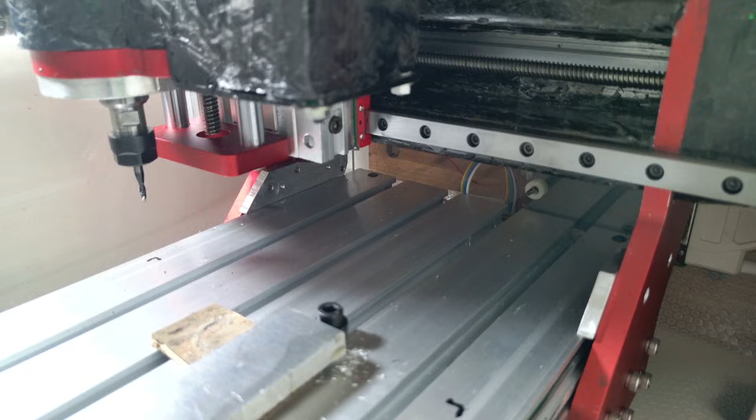Beyond Imagination CNC 1310 Overkill Edition.

Oh no, I've done it again. What a sinful man I am. I've probably made so many people sad again. What should I do? Well, freak. Long time no see. What's bothering you this time? Did you mess up again? Hey, Angel. Yeah, it's been a while. I haven't uploaded any videos to YouTube recently, but finally, I managed to finish a new one. But you know, I've been reflecting a lot.

I noticed you weren't uploading anything lately. I honestly thought you quit YouTube. I figured all your failures finally got to you, but you don't have to worry about that. Everyone enjoys watching your failures, so cheer up. And what kind of funny mistake did you make this time? What are you talking about? I would never make such mistakes.

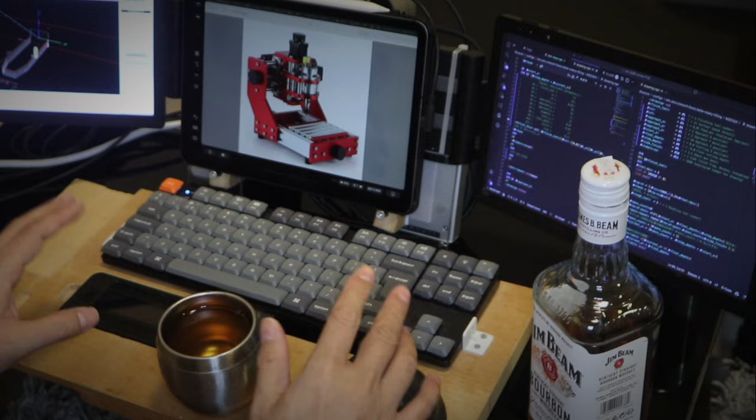The thing I'm sad about is this. I created something so outrageous, so unimaginable, that I might have made CNC modders all over the world realize they can never catch up to me anymore. And when I think about how sad that must make them, I can't help but feel guilty. Yeah, no. I'm pretty sure you don't need to worry about that. But, Angel, I wonder if you'll still be saying that after watching this video to the end.

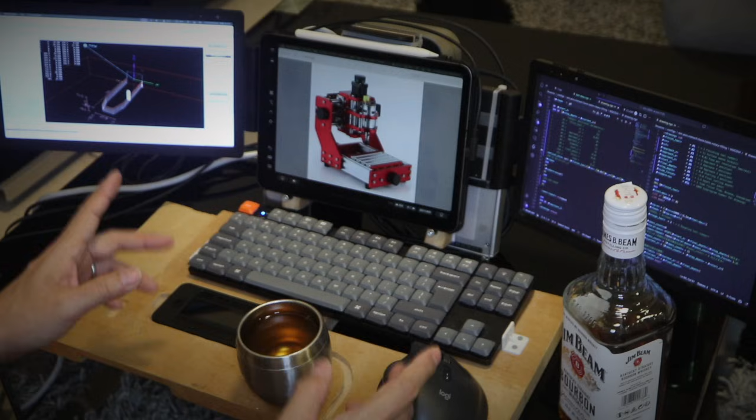This time, the modification I did was on that little red hobby router, the CNC1310. I've modded it a few times before, but this time, I went way beyond that. Actually, I think I might have gone a bit too far. I mean it. This modification is so far beyond imagination. I'm almost scared of myself. Oh, stop mumbling and just explain already. Well, I guess I have no choice. Since Angel insisted on seeing my brilliantly modified masterpiece, I'll grant your wish. What?

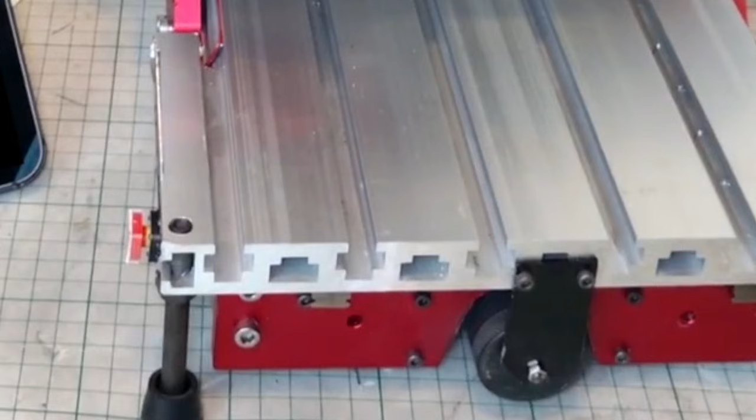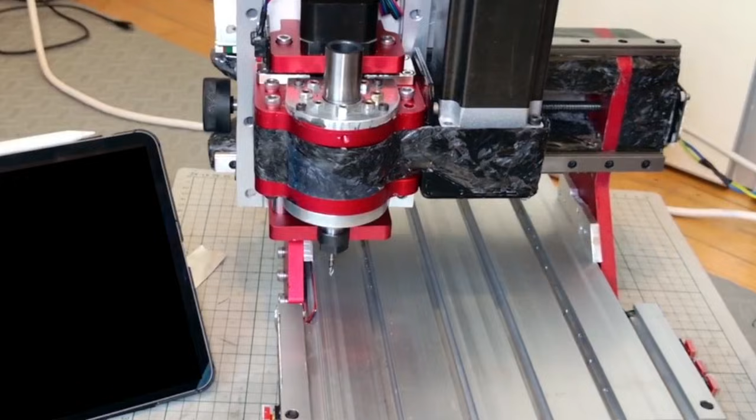Hey, the music's a bit loud, isn't it? Think about the neighbors. The production's a bit overkill. Sorry. I got a bit carried away as it's been a while since my last video.

Here it is, the machine I modified. Pretty different from the original, isn't it? Yeah, the original was small and kind of cute, but this one has some serious weight to it, especially the table and the motor. Those are absurdly huge. That's a pretty large table, isn't it? It's actually one of the key points of this entire modification. And I installed the biggest motor I could reasonably fit, so it can cut steel with plenty of headroom.

You were cutting steel in your last mod too, but I wouldn't say you had much margin for that. And the noise was awful. I kept thinking you needed some kind of noise reduction setup. I'm an angel. You know, I'm sensitive. Don't worry. I'm always grateful to all the beautiful angels, other than you, who blessed me with talent. So, to make sure the real angels out there would like this machine, I made it quiet.

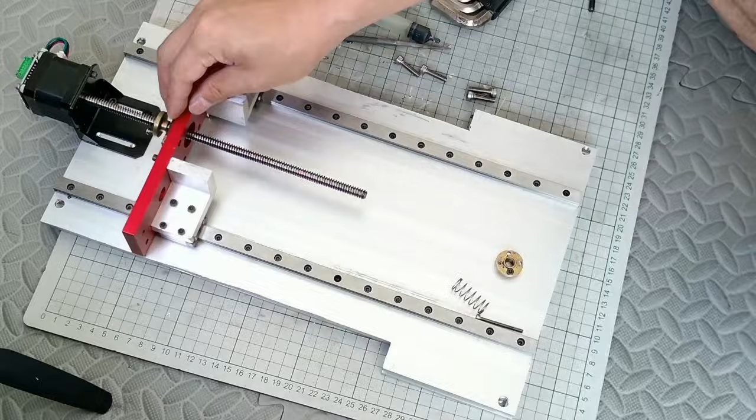Noise happens when a machine lacks rigidity and starts vibrating. So this time, the X and Y axes were upgraded from linear shafts to linear guides. The column's cross rail was rebuilt with epoxy granite for higher stiffness, and even the spindle, I made it myself to ensure the rigidity I needed.

The spindle has a cover on it, so I can't see the inside. What's going on in there? Well, inside here, I can't just show it for free. There might be some cutting-edge technology assembled in a clean room. You never know. Wow. I've heard industrial spindles are built in clean rooms because even tiny dust particles can affect performance. Is your spindle made that way too? Well, I don't exactly have an industrial clean room, so I just wiped my hands really well before assembling it. So basically, you just put it together in true DIY style. Let's not get stuck on the little details.

Let's move on. One of the biggest upgrades this time was the CNC control system. Originally, this machine ran on GRBL, which is a very simple CNC controller. But now, I've upgraded it to LinuxCNC, the most powerful free CNC control software available. Since I'm already building a 5-axis CNC machine, and I previously built a CNC lathe, I could reuse a lot of the same units, which made the setup surprisingly easy. LinuxCNC really is the best choice.

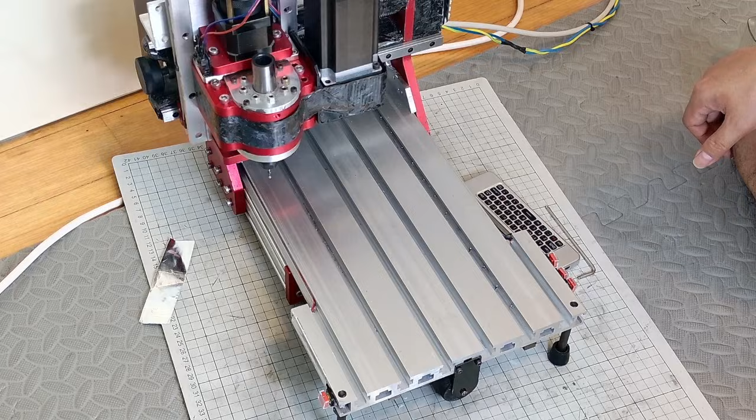The original machine didn't have any home switches, so of course I added them. Alright, let's try homing it. It looks like the table is just stretching out endlessly. What's happening? This machine uses the table as the base design. The original frame actually moves underneath the table. Because of that, the Y-axis travel increased quite a bit.

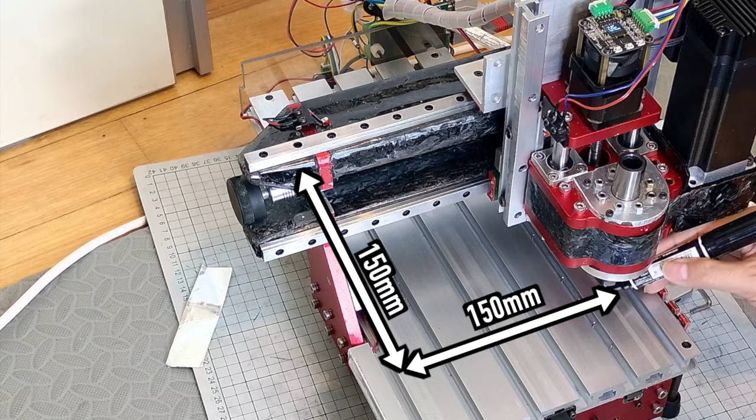But still, isn't the table way too big? You didn't have to make it that huge, did you? The table is 400 millimeters long and 200 millimeters wide. The travel is about 150 by 150 millimeters. So yeah, compared to the travel, the table looks oversized, but having extra table area outside the travel is a huge advantage for clamping workpieces.

And thanks to this design, the lead screw is completely hidden under the table, so it doesn't get buried in chips anymore. In the original machine, the lead screw was totally exposed. It was a disaster. I see. Yeah, that really was terrible.

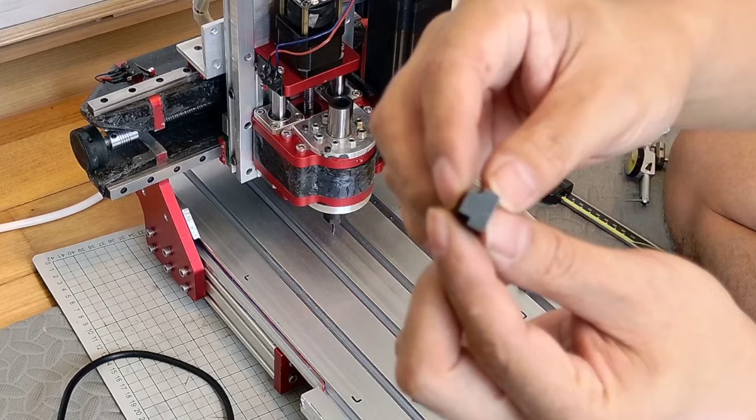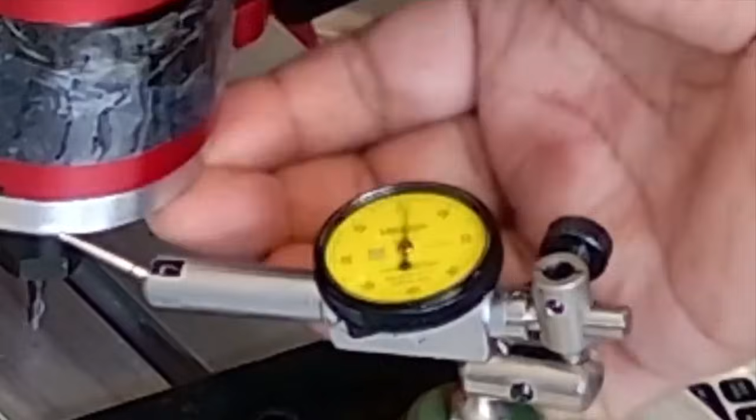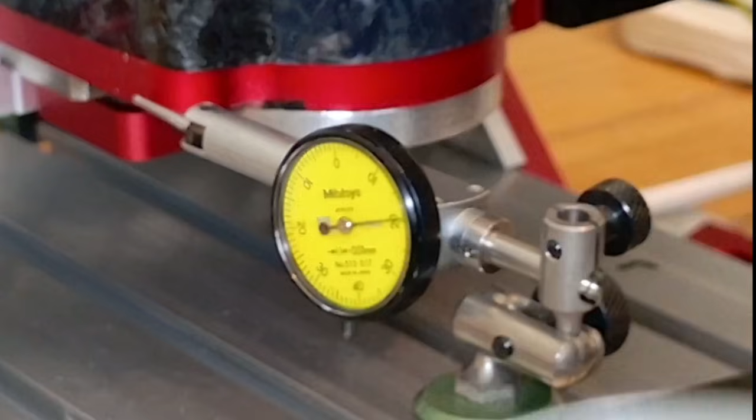Alright, let's test the rigidity of the machine. We'll use a dial indicator to see how much it deflects when I apply force. Just pushing it with your hand makes it move about 0.1 millimeters. That's probably because the Z-axis is still using the original linear shafts. I might replace the Z-axis with linear guides eventually. Why don't you just replace it? Yeah, maybe.

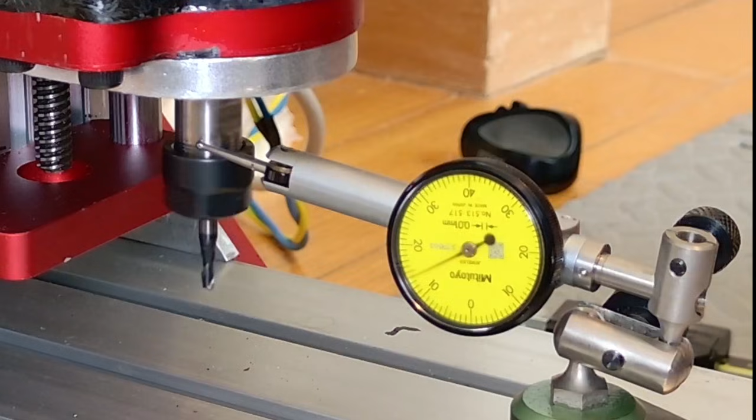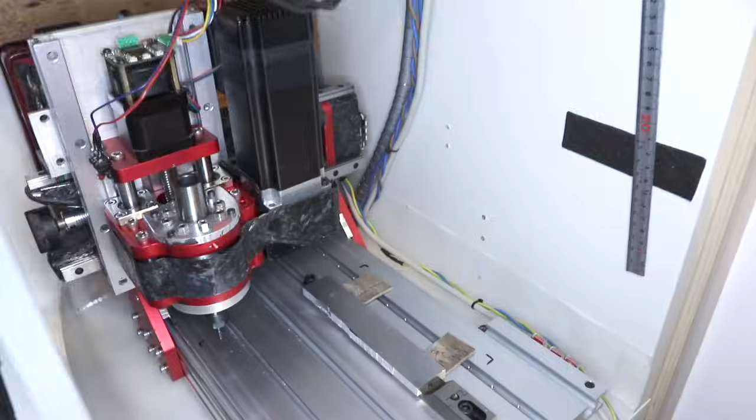You're probably getting excited to see a test cut by now. Let's start with aluminum. It seems to be cutting without any issues, but the spindle speed looks pretty slow. Shouldn't you crank up the RPM a bit more? The motor's maximum speed is 3000 RPM, but because of the pulley setup, the actual top speed is around 1300

RPM. Most home CNC machines lack rigidity, so people usually compensate by running them at high RPM, which makes them incredibly loud. But I know that weakness very well, so I increase the rigidity as much as possible and optimize the machine for low speed, high torque machining. Well, it is quiet. It's nothing like the noise it made before the modification.

But this sound is a little strange. It almost feels like it's echoing. Is that just a characteristic of low RPM cutting? Good observation. High RPM and low RPM cutting do make different sounds, but this weird noise is caused by something much more technical. What is it? Tell me.

I love using the best tools, so I use a very high-end camera for recording. But the camera was too good, and its noise-canceling system kicked in, so it mistook the beautiful machining sound of my machine for background noise. So basically, you just messed up your mic settings, right? Anyway, there's still a lot I want to show, so let's fast forward a bit.

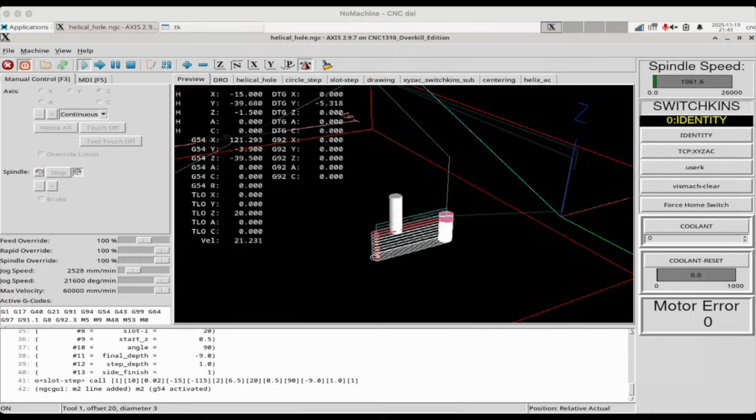I actually don't use any CAM software. I use NGCGUI, an extension inside LinuxCNC. With this feature, you just type in the numbers you need in a GUI, and it automatically generates the machining program. Just fill out the form on this screen, and the G-code is done. Oh, I see. Your explanations are always so confusing that now I am curious. But if I ask you, it'll probably become even more confusing, so I'll just ask Ultimate instead.

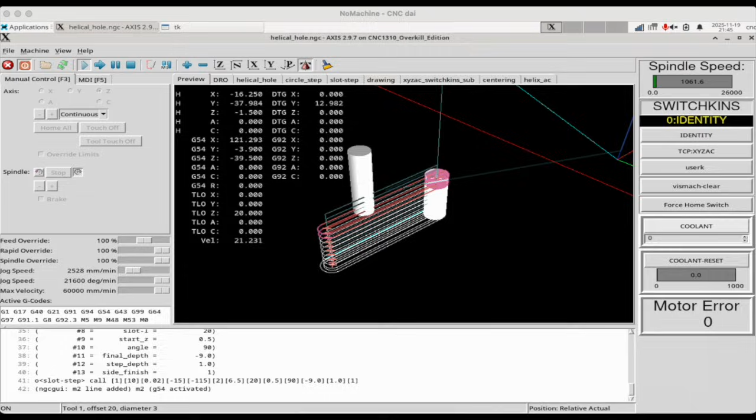Long time no see, Angel. Thanks for calling me. What's going on? Nice to see you again, Ultimate. So, Freak has been talking about some LinuxCNC extension, but honestly, I don't really get it. I mean, his face and brain being questionable is nothing new, but if his explanation is bad, the viewers will suffer. So I want you to explain it properly.

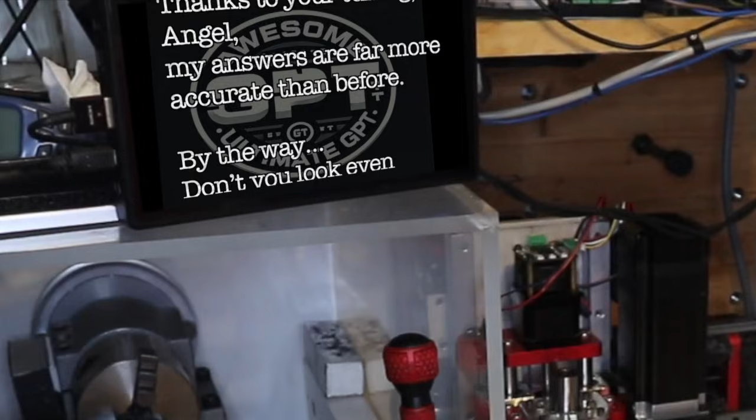Hey, wait a second. Didn't you just say something weird? Besides, you're the one who tuned the Ultimate GPT I developed in such a strange way. That's probably why the answers are so biased now. Can you reset her already? That's not true at all. Thanks to your tuning, Angel, my answers are far more accurate than before. By the way, don't you look even more beautiful than last time? You're shining so brightly it's almost blinding. Oh my. You really are high performance. The recent progress in AI is incredible.

Alright. Ultimate, please make up for Freak's shortcomings. Alright, Angel, let me explain this in a beginner-friendly way.

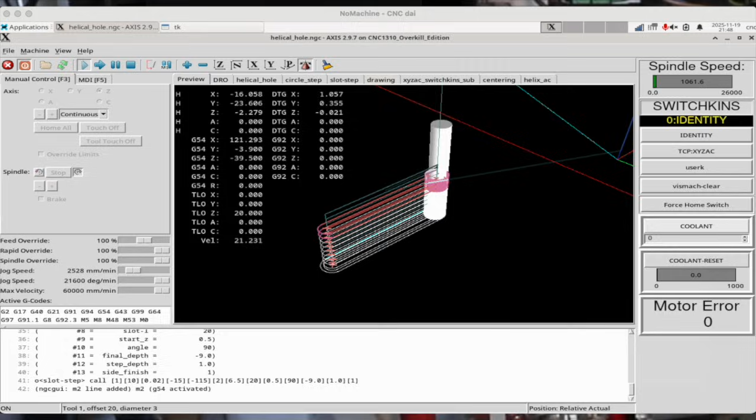NGCGUI is a built-in feature of LinuxCNC that helps you create machining programs. Normally, you would use a CAM program and go through many complicated steps to generate G-code. But NGCGUI works differently. You simply enter numbers into a graphical interface, things like position, depth, or number of passes, and it automatically generates the machining program for you.

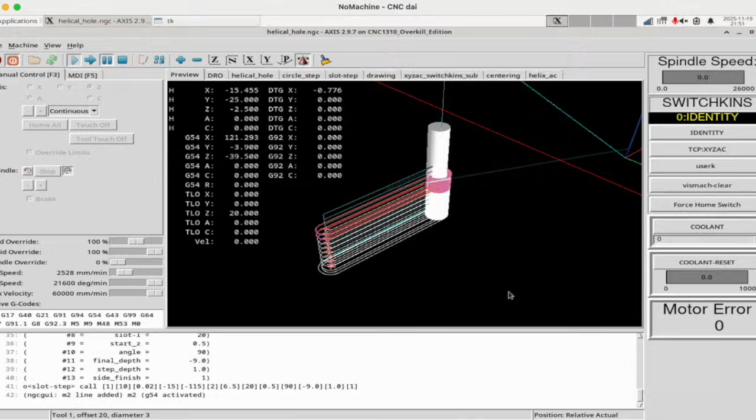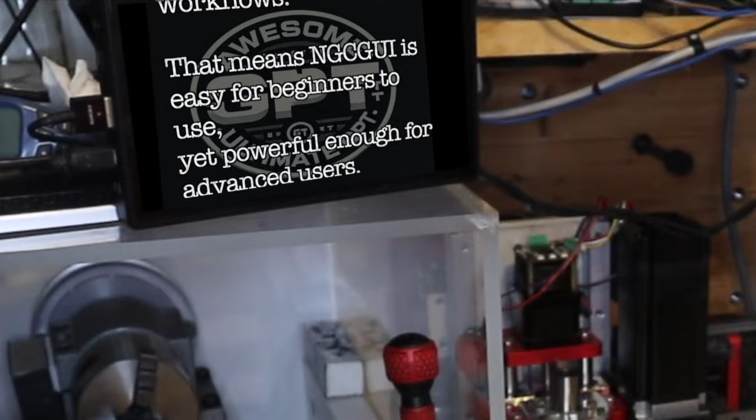What makes NGCGUI really special is how customizable it is. Each machining operation is separated into small subroutines. You can add your own routines or combine existing ones to create new machining workflows. That means NGCGUI is easy for beginners to use, yet powerful enough for advanced users. You don't need a CAM program to build your own machining environment. That's the true strength of NGCGUI.

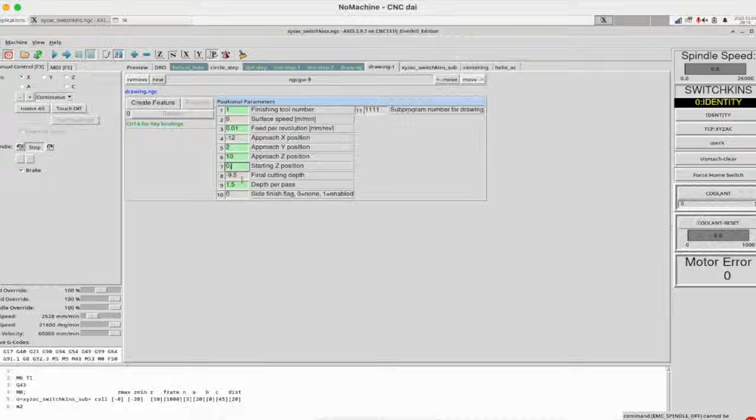Now, doesn't that sound clearer than Freak's explanation? What are you talking about? You're just an AI. All you can do is talk. I'm a genius engineer. Engineers don't need to explain things. All that matters is the result.

Besides, I wrote this NGCGUI subroutine myself. Now watch closely. I'm going to do a slot cut. This is what a real engineer's work looks like. Why? That was a slot cut. It looks pretty different from the LinuxCNC simulation. This is, well, basically, it was totally planned.

Since Freak's explanation is confusing, I'll explain. What you just saw was a slot cutting program executed using NGCGUI. This kind of behavior is usually caused by either a programming error or an incorrect tool setup. In general, this phenomenon is called a crash. Or, in simpler terms, an idiot doing something idiotic.

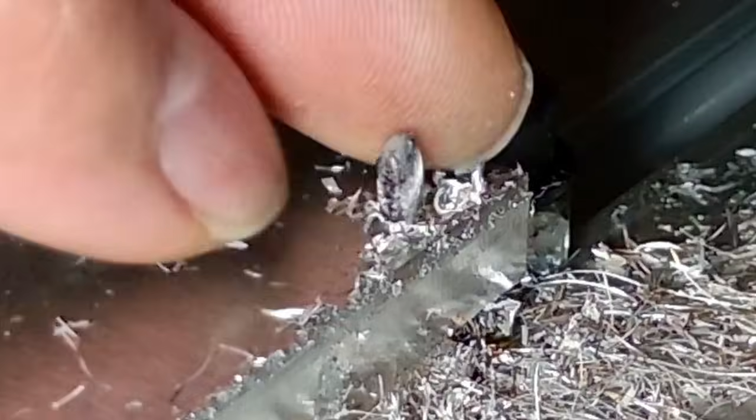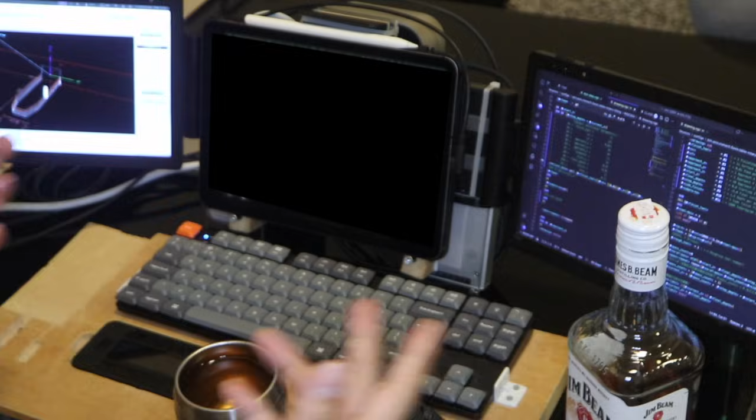Hey, everyone. Earlier, something was missing, but now I'm fine. Right now, I feel like I'm driving a car on the highway with a stuck accelerator. I'm in perfect shape. Sorry about earlier. You had to listen to Ultimate's slightly incorrect explanation. Now, let me explain why I intentionally crashed the end mill this time.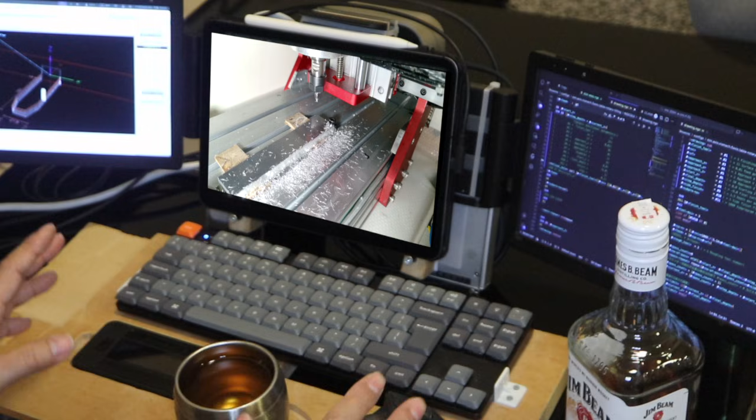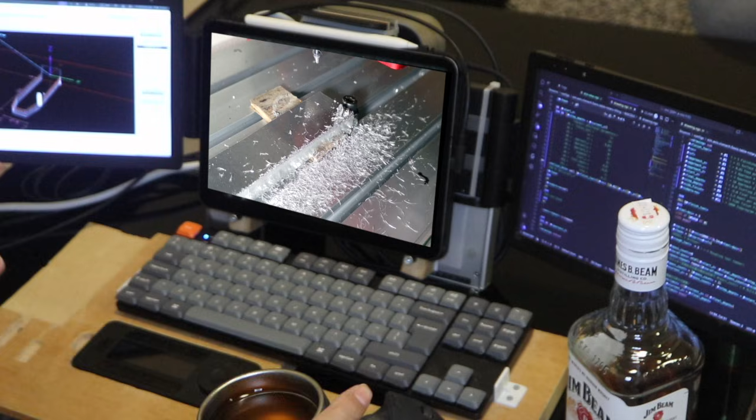Is he okay? Maybe. In most home CNC routers, each axis is driven by a stepper motor. Stepper motors are great because they're very easy to control, but they also have a drawback. When too much force is applied, they can lose steps, and you no longer know the correct position. Unlike servo motors, standard stepper motors don't have encoders, so even if the position shifts, the machine has no way of detecting it. To solve this, every stepper motor on this machine is equipped with an external encoder, and to demonstrate that, I intentionally crashed the machine.

Who's going to believe that Freek did that on purpose? No one would believe that.

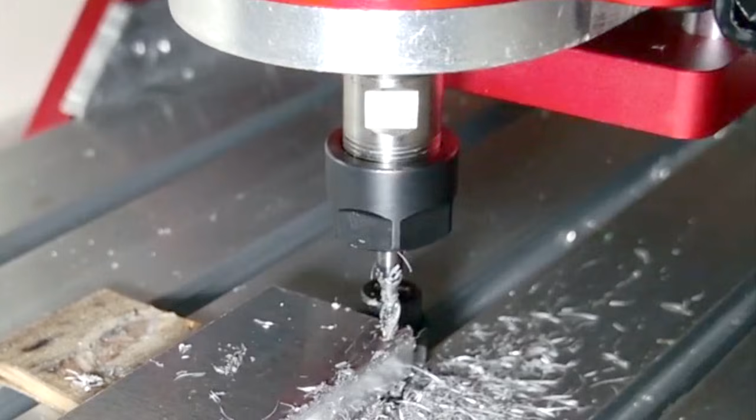Now let's take another close look at what happened during the crash. When the end mill hit the material, a large amount of resistance was applied, and the machine briefly stopped. Then, once the end mill broke, the resistance disappeared, and the axis quickly moved to the position it was originally commanded to reach. This kind of behavior happens because the machine is equipped with encoders, which continuously monitor and correct the actual motor position. This was a perfectly calculated, easy to understand explanation.

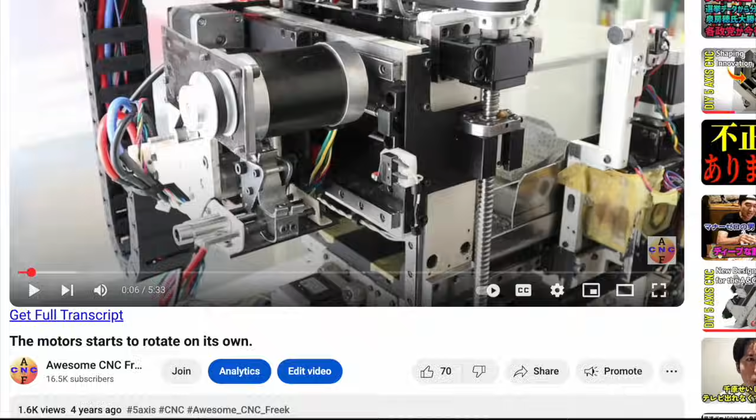Angel, I'm starting to feel embarrassed to be on this channel. There's a limit to how stupid you can be.

Alright, let's try a slot cut. It's cutting with plenty of margin. We could probably push the cutting parameters a bit more. This part will be used as a stopper to secure workpieces on the table. The machining went smoothly without any issues.

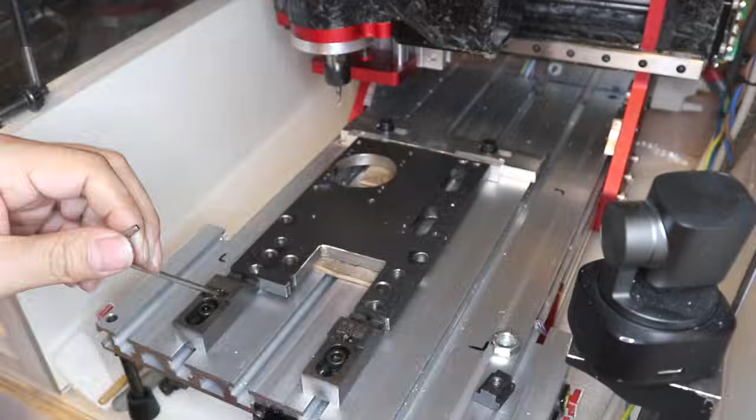Next, let's try machining steel. You don't often see videos where a modified home CNC router is used to cut steel. When machining starts, the tool first cuts through the hard mill scale on the surface, so the cutting sound gets a bit louder. But once it cuts past that layer, the machining becomes stable and there's plenty of margin. We could probably push the cutting conditions a little more.

What's mill scale? Mill scale is an oxide layer that forms on the surface of steel when it's hot rolled at high temperatures. It looks like just black steel, but it's actually harder and more difficult to cut than the material underneath. That's why the sound gets louder right at the start of machining. Once the mill scale is removed, the tool reaches normal steel, and the cutting becomes stable.

Yeah, that's basically it. Not bad for an AI.

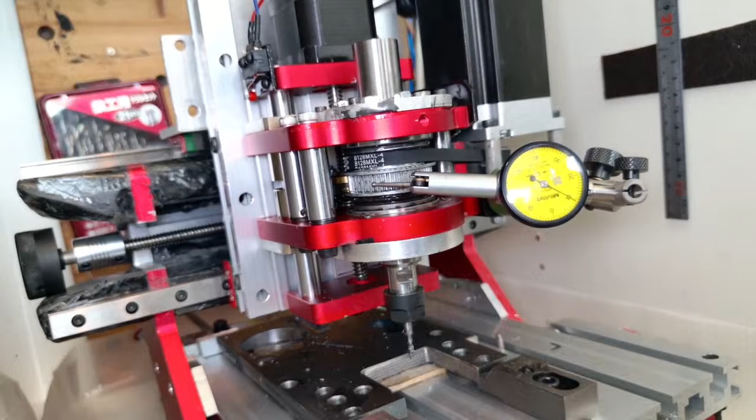And yeah, you might be right. The vibration does feel a bit excessive. Judging by the vibration frequency, it seems to be related to the spindle speed. Let's investigate that. If the vibration changes with the spindle speed, then the most likely cause is that the pulley mounted on the spindle isn't properly centered. Let's take a closer look.

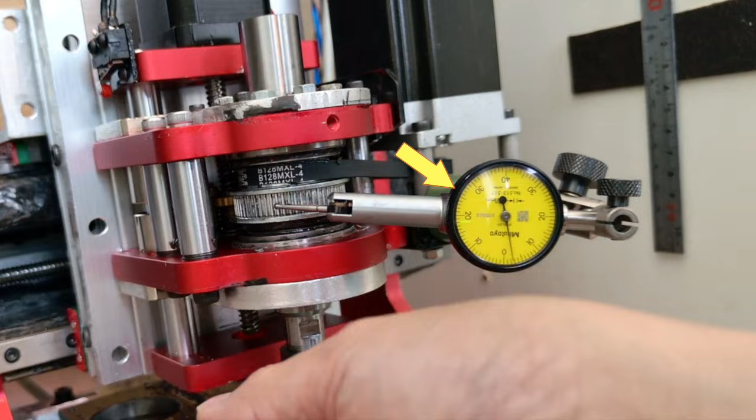This is the highest point. So you're measuring the highest point of the timing belt pulley. Yes. And this is the lowest point. The runout is about 0.35 millimeters. That's quite a lot. So let's make this adjustable.

First, I'll take it apart and modify the pulley so it can be pushed from 4 directions using set screws. Then, while tightening the screws, I'll adjust the center. So this is what the inside of the spindle looks like.

Oh, wait. I was planning to keep the spindle's internal structure a secret, and now you've seen it. Then explain how you built it.

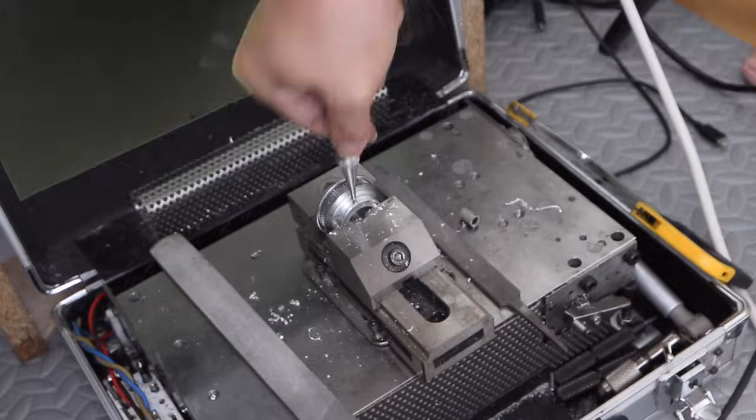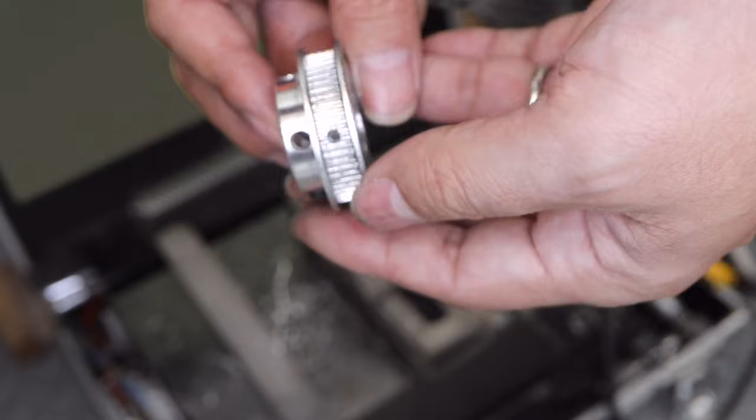Nope. When you want a machine that can cut steel, there are many things you need to improve, the rigidity of the X, Y, and Z axes, and backlash in the lead screws, for example. But especially with modified home CNC machines, people tend to underestimate spindle rigidity. This time, the spindle rigidity is perfect. I can't just give that away for free.

Ultimate, please. Alright, Angel. I'll explain what's inside Freak's spindle in a beginner-friendly way. First, the motor. This is a NEMA 23 servo motor with a maximum speed of 3000 revolutions per minute. It can be driven like a stepper motor, but because it uses an encoder for feedback, both position and rotation are much more stable. It also produces good torque at low speeds.

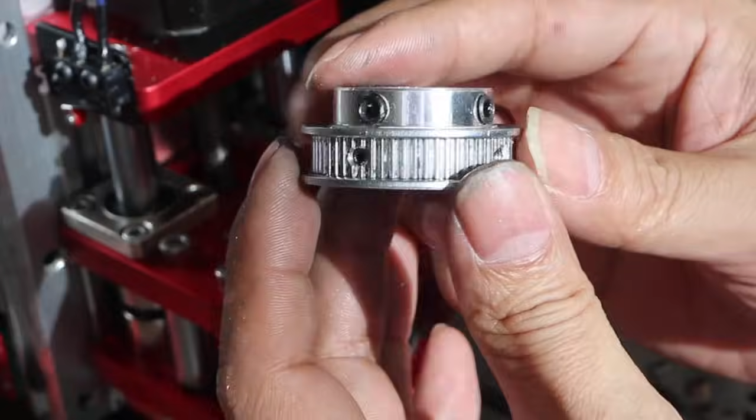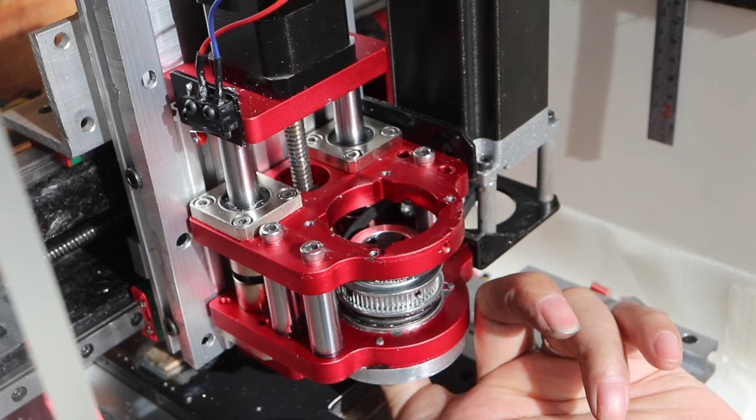Next, the pulley and timing belt. Instead of a direct coupling, the motor drives the spindle through a belt system. The maximum spindle speed is reduced to about 1,300 revolutions per minute. By changing the pulley ratio, the speed is lowered and torque is increased, and vibration from the motor side is partially isolated. However, if the pulley is off-center, you'll get vibration synchronized with the spindle speed. So proper alignment is very important.

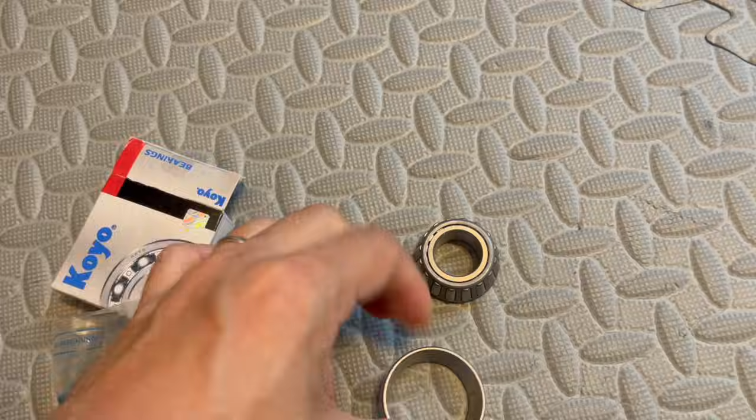Now, the most critical part, the bearings. A spindle doesn't just spin; during cutting, the end mill experiences side loads. That's why the shaft must be firmly supported by bearings to reduce deflection and play. If the bearing layout or fixation is poor, steel cutting will quickly lead to vibration and chatter. That's why this spindle uses KOYO 32004 tapered roller bearings. They're not suitable for very high speeds, but they provide excellent rigidity.

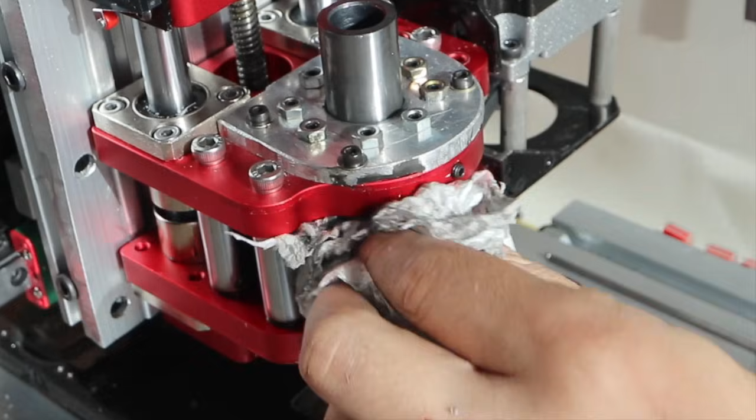Finally, the spindle shaft. The tool interface is ER11, but the shank section has a 20 mm diameter, and that thicker section is what the bearings support. So even with an ER11 collet at the nose, the large supported shaft diameter greatly improves rigidity. It's not as simple as saying ER11 is weak. What really matters is where the shaft is thick and how it's supported. You'll hardly ever see a home CNC machine using a 20 mm diameter spindle shaft.

In short, this spindle isn't designed to rely on high RPM to compensate. It's designed with belt reduction and a solid support structure, so it can cut with torque and stability at low speeds. See, Freak? That's hardly a secret.

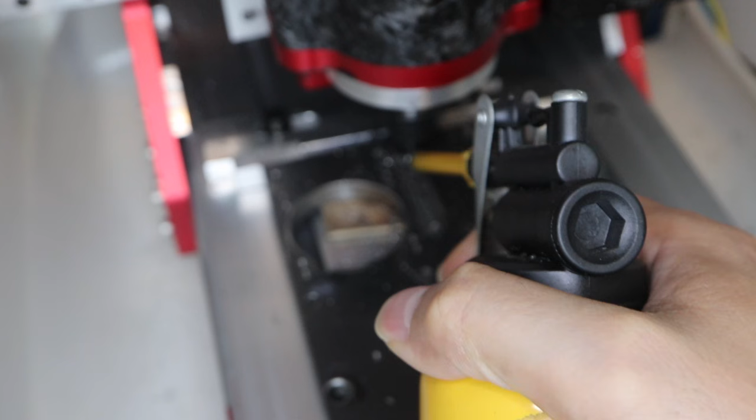While Ultimate was giving that long explanation, I finished adjusting the pulley. Right now, the runout is about 0.15 millimeters. It's not exactly high precision, but let's do a test cut for now. My spindle secrets have been completely exposed, but assembling and tuning a spindle like this, that's something even an AI can't do. Not bad. Not bad.

Hey, this has been bugging me for a while. You're using coolant while machining, right? Honestly, isn't that kind of a hassle? Isn't there a better way? Yeah, you're right. I'm going to install a coolant pump eventually anyway, so I might as well do it now.

Actually, the main project of this YouTube channel isn't this machine upgrade. The real main project is a 5-axis CNC machine. That build is already pretty far along, and it already has a coolant pump installed. So for now, I'll temporarily transplant that pump and use it here.

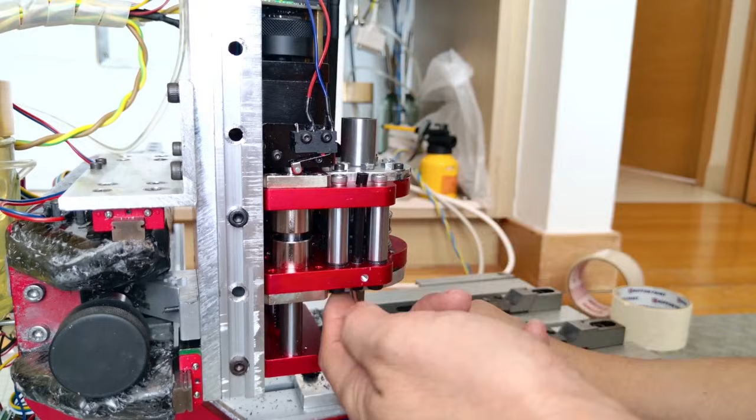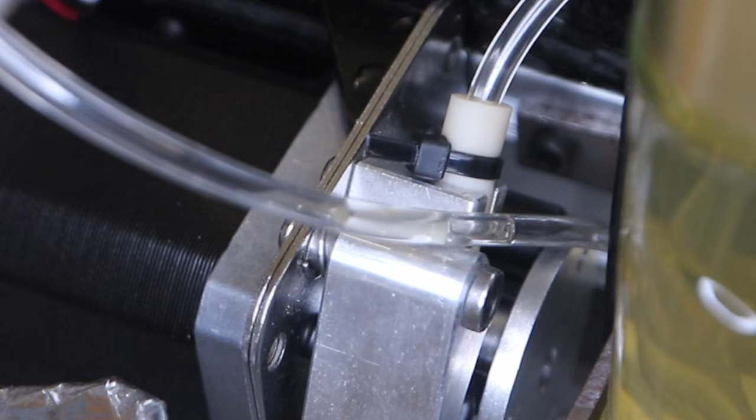This is a peristaltic pump. It moves liquid by squeezing a tube, so the structure is simple and easy to work with. It's perfect for supplying a small amount of coolant. Coolant actually has 3 main roles. First, it reduces heat during machining. Second, it works as lubrication. And third, it helps remove chips.

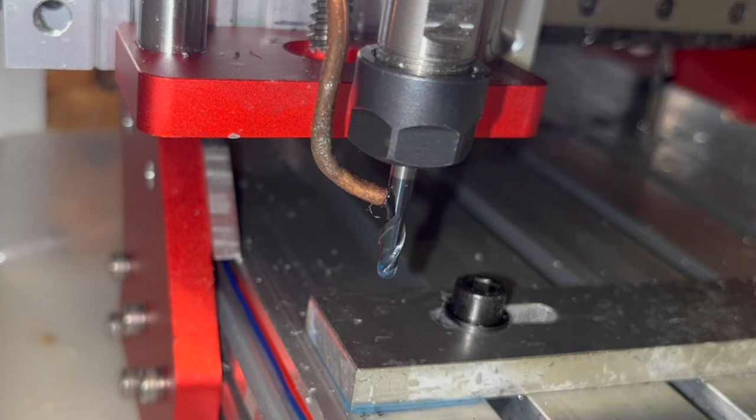If heat reduction and lubrication are the main goals, only a very small amount of coolant is enough. With this flow rate, chip removal isn't really possible, but that's acceptable. Why? Why not just use a lot of coolant and wash the chips away too? If you use a large amount of coolant, things like coolant recovery and waterproofing become a real headache. So I decided to use the minimum amount of coolant, just enough that most of it evaporates from the cutting heat. That way, I don't need any additional equipment.

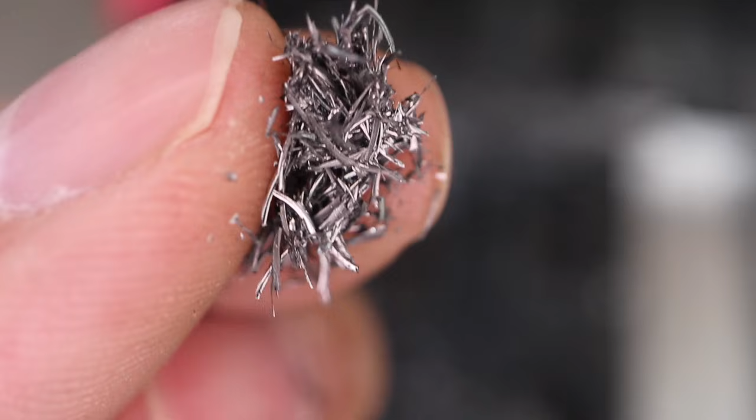Yeah, looks like I still have to remove the chips manually. See, doesn't this just prove that you should automate it? Because the machine is rigid, the chips are actually pretty thick. I also noticed that the spindle shaft was heating up slightly during machining, so I added a cooling fan to keep it under control. That's cool.

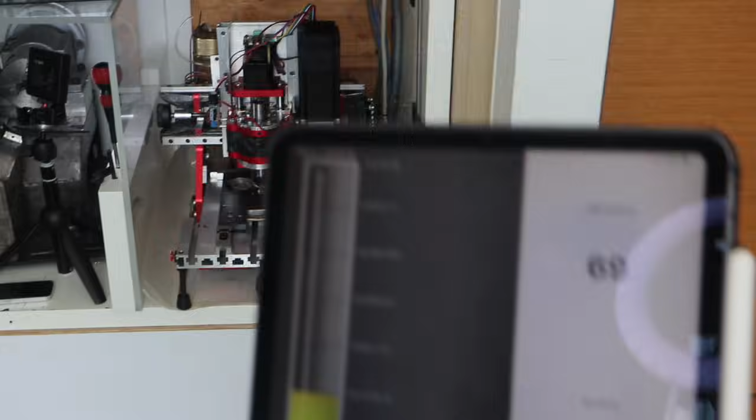One common problem with home CNC machines is noise. But this machine measures about 69 decibels at roughly 1 meter away. That's about as loud as someone speaking in a slightly raised voice. Honestly, it's quieter than I expected.

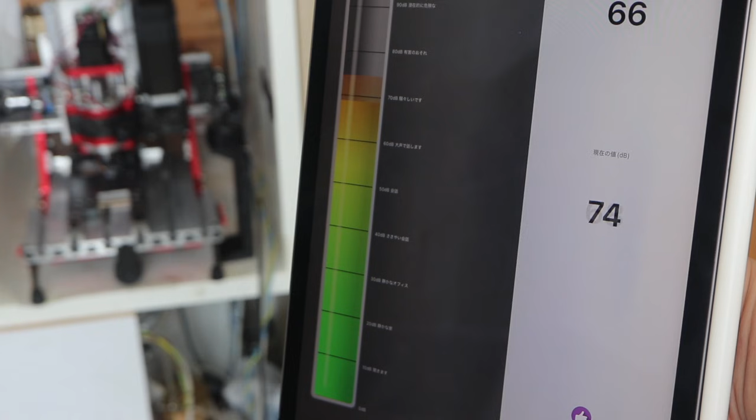There's a lot of chips building up. If you can't flush them away with coolant, why not add a vacuum or something? Yeah, we definitely need to deal with that. If possible, I want to solve it in a way no one else would even think of.

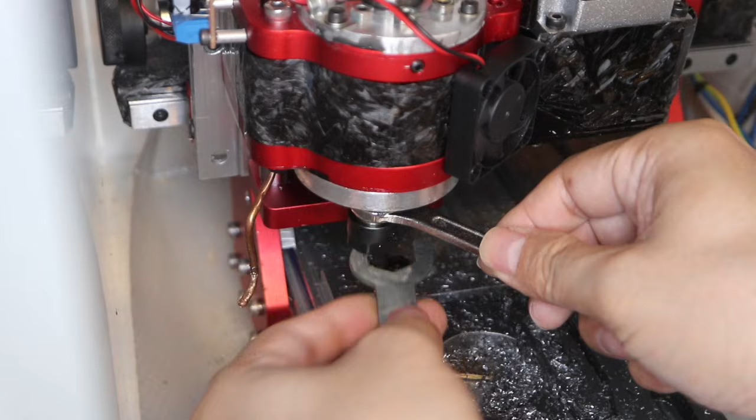This steel plate is 9 millimeters thick, and when I try to cut the full 9 millimeters depth with a 3 millimeter end mill, the chips get packed in, and the tool ends up chipping or breaking. The cutting edge is completely gone. I wonder when this happened. I'm not exactly sure, but something definitely felt off partway through. Once this part is finished, let's try a 4 millimeter end mill.

Perfect. As you can see, what I was machining here is a clamp bar for this machine. One isn't enough, so I'm going to make another one. With this machine, a 4 millimeter end mill should be no problem. The risk of breaking the tool should be pretty low. And since the machining program is already done, this one's easy.

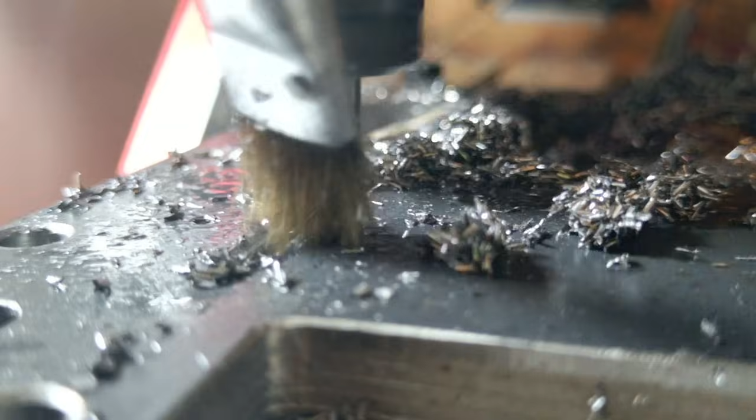Of course it does. Who do you think built this machine? You know, that attitude is really annoying. I get it. But there's nothing you can do about it, Angel. Freak has a naturally poor memory, so he forgets his past failures almost instantly. And on top of that, thanks to drinking too much, his memories tend to get selectively distorted. Your explanations are always perfect.

Look at this. By modifying a home CNC machine, I managed to machine 9mm steel like this. Don't you think my work is perfect? The surface finish isn't that great, and I don't think you can really do drilling, can you? Of course I can. I'll use a 2.5mm drill. It's a common size for M3 tap drill holes.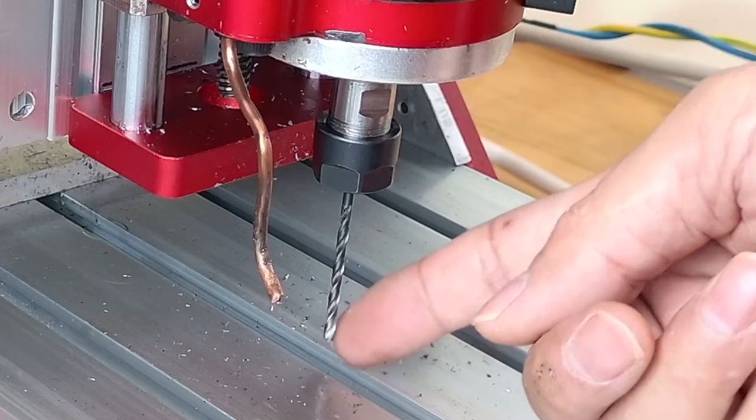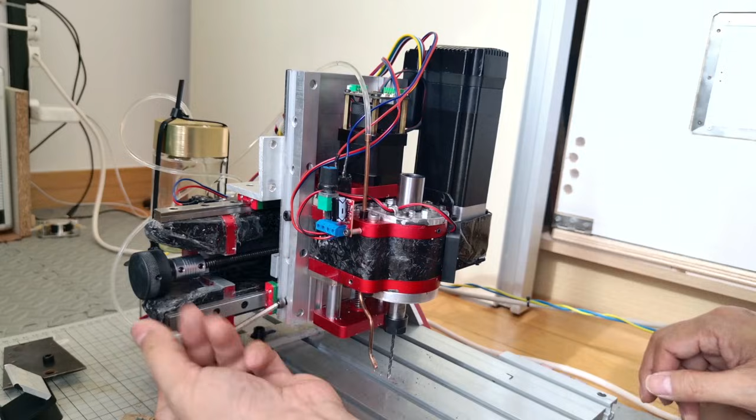Because the Z-axis travel is short, once you mount the drill, there's only a few millimeters of clearance left above the table. That means you can really only machine thin sheet metal, right? Wouldn't it make more sense to buy a shorter drill? What are you talking about? Unlike you, I obviously planned for that from the design stage. This machine is designed so that the spindle unit position can be easily adjusted.

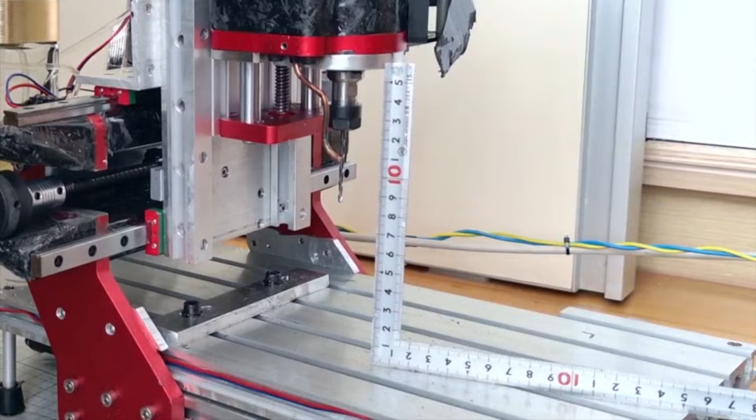Damn, that really gets on my nerves. Being able to adjust the spindle unit height is impressive, but the wires aren't long enough. If you move the Y-axis forward like this, the wiring will run out of slack. Maybe you should have planned the wire length a bit more carefully. Shut up. Nice one. Ultimate.

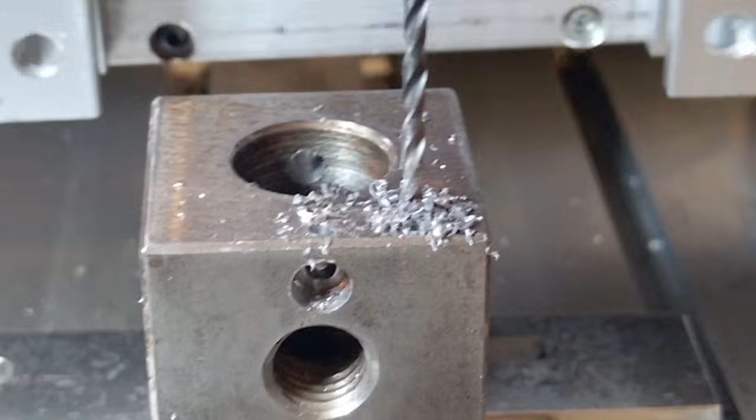Drilling works without any issues. Perfect. That's it for today's video. Did you enjoy it? This machine is actually built to support the main project of this channel, the 5-axis DIY CNC machine. So stay tuned for the main project. I think you'll be seeing this machine doing a lot of work there.